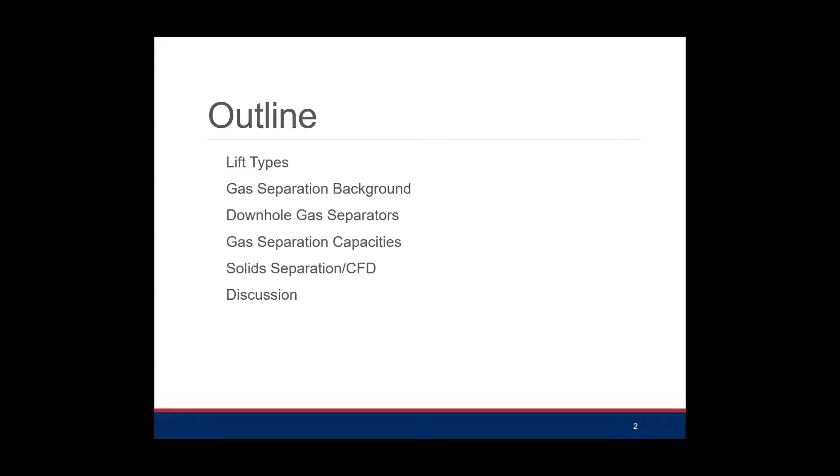The different types of downhole gas separators. We'll dip into the basic gas separators, talk about gas separation capacities, because that's something service companies always talk about - gas separation capacities. But where do those capacities come from? How do you calculate those? And then some research we did last year when work started to slow down during COVID, we started focusing on solid separation and combining that with CFD, computational fluid dynamics. And then just a general discussion.

So artificial lift methods in the US - there's a few more beyond this - but electronic submersible pumps, ESPs, rod pump, gas lift, plunger lift, and jet pump.

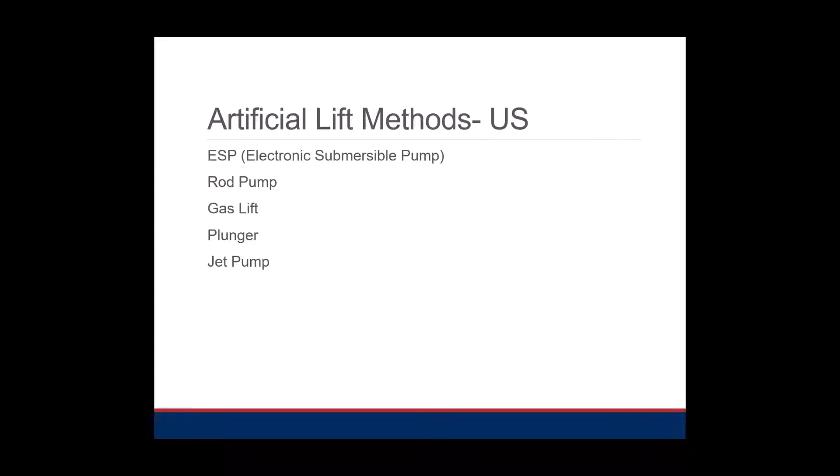So a rod pump is basically, we've seen it, a pumping unit. That pumping unit is tied to a rod string. That rod string runs downhole to a subsurface pump. It reciprocates up and down. The majority of US wells today eventually go to some type of rod pump well.

And each one of these rod pumped wells has a gas separator. So downhole pumps don't like gas. Gas is fairly compressible, whereas fluid is not compressible. So its efficiency - the whole system loses efficiency if gas is in that system.

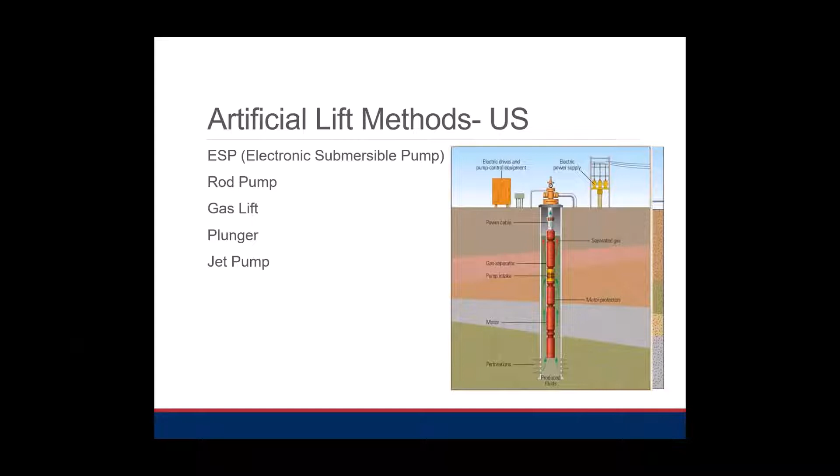Same thing with an ESP. So an ESP is an electronic submersible pump - it's a series of motors that spin a pump, and on those they have gas separators as well. So they're used in a higher volume type well.

A gas lifted well - you're essentially pumping gas down the annulus and injecting it into multiple gas lift valves, trying to reduce the hydrostatic column so the well will lift. Plunger lift can be combined with gas lift, where you have basically a tool that travels up and down in that tubing and helps lift some of that fluid so that gas can flow. And then jet pump is something that is still used today, but not quite as much.

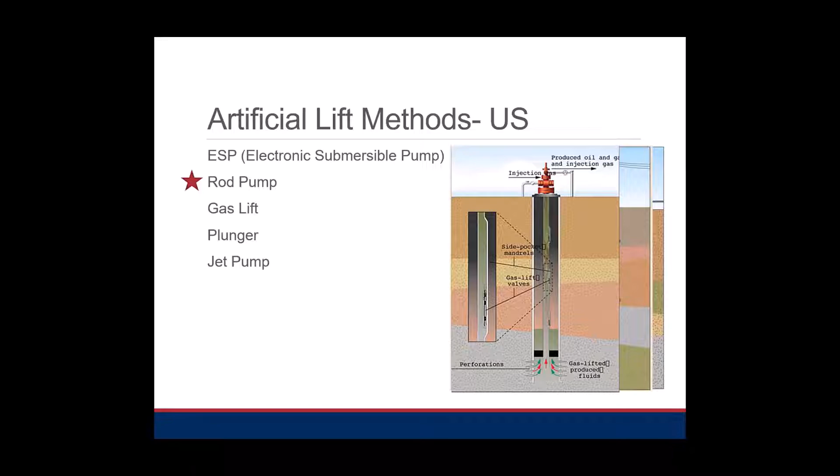So today, again, we're talking about rod pump, gas separation, solid separation, and a lot of these gas separators can be tied to ESPs as well.

So again, taking it back to basics - separator capacities, and looking at the rod pump system as a whole system. So what is it? What are its components? It's a motor, an electric motor - fairly efficient. It drives gears. The gears on the pumping unit are relatively efficient as well.

The rod string tied from the surface to downhole runs through tubing. That rod string rubs on tubing, so that's a little bit less efficient. The downhole pump is fairly efficient, so when it goes up and down, it pulls fluid with it, and that's efficient as well. And then we get to the downhole gas separator, and that was the thing that varied the most, from 0 to 99%.

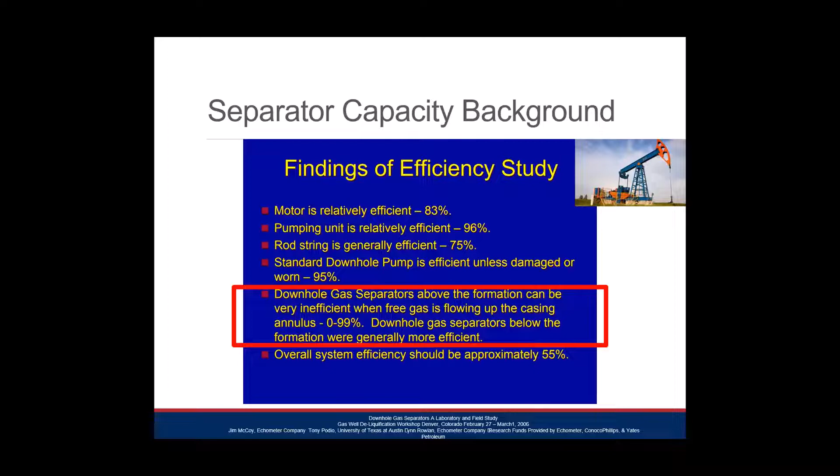So you can have a well that's gas locked, pulling in gas and essentially cannot pump, or you can have a very good gas separator that pulls in 100% fluid, and the whole system is more efficient. So overall, we wanted to look at the downhole gas separator and how it affects the whole system.

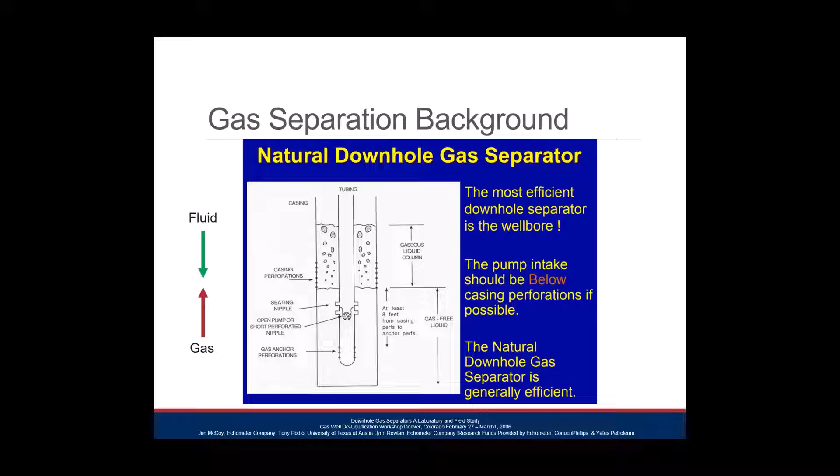So again, gas separators have been around for a long time, and the thing that's changed in the last few years is horizontal well bores. Historically, we've been able to sump a pump down below our perforations, and so gravity essentially does all the work. As fluid falls down, because gas is lighter than fluid, gas will go up. So slowly the liquid will come into the well bore and gas will rise, producing gas up the annulus and the fluid through the tubing.

Up until the early 2000s, we were able to drill a little extra rat hole, sump a pump down below the perforations on our target zone, and then put a pump below that target zone. Whereas today, drilling horizontal wells, we're either stuck leaving a pump at kickoff point or somewhere in the curve.

With these rod pumps and ESPs, they don't like to go through bends. They have moving components, and if we put them through a curve, they typically wear out, so we see more failures. Essentially today we see a lot of pumps stuck at kickoff point or sometimes pushed down through the curve. So we're now having to produce fluid and gas around that pump, and that's why a gas separator is a lot more necessary today than it may have been in the past.

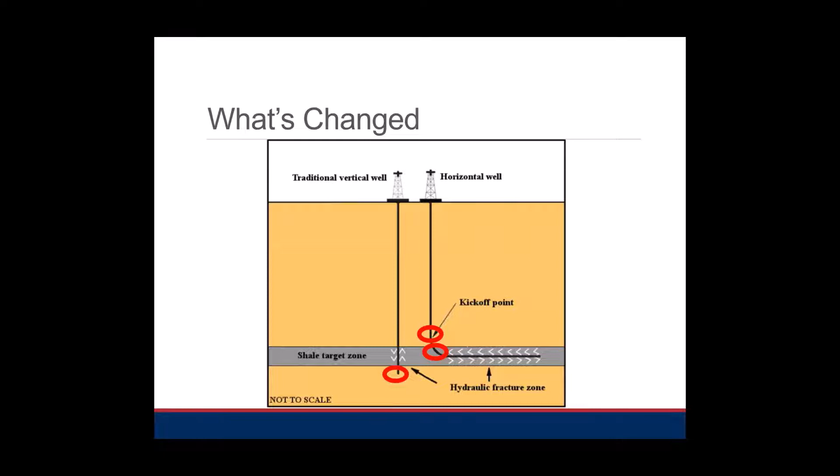But if we produce too much, we'll pull in some of that gas in with that fluid.

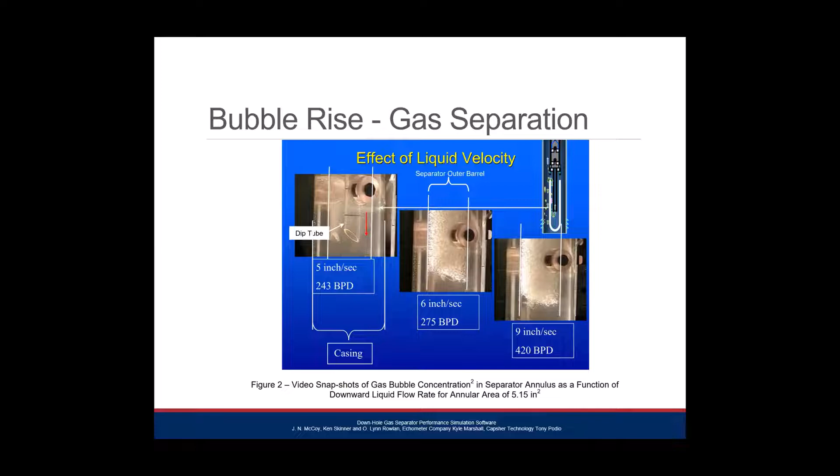At 9 inches per second, we're pulling down that fluid really fast. We're at 420 barrels a day, and we're pulling in a lot more gas, so the pump is much less efficient. This is the basics of bubble rise velocity, fluid production, and the gas separation area. All of those things are important to understand.

From that study, we're able to determine that gas is lighter than liquid, so gas will rise at a certain rate as fluid is being pulled down. We can do volumetrics and calculate the amount of fluid we can produce per square inch. In this case study with water and air, we're able to produce 50 barrels of fluid air-free per square inch.

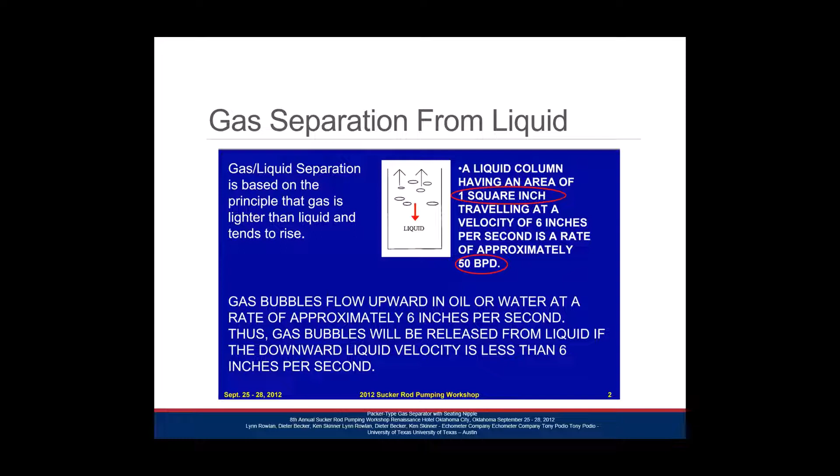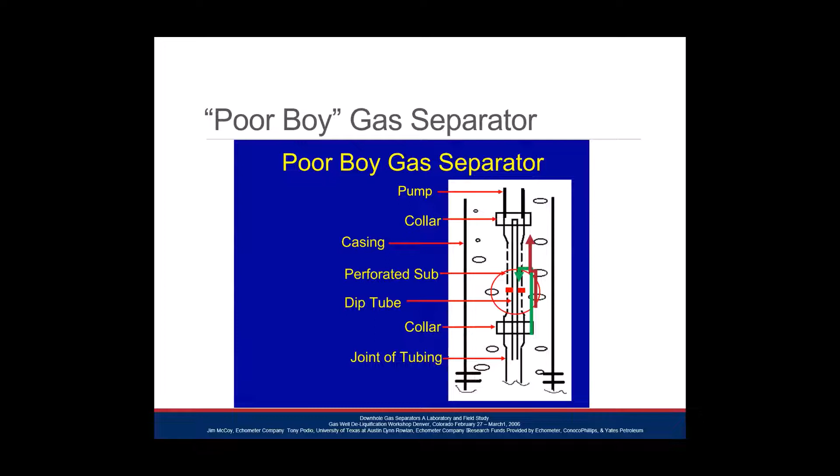Now we're looking at the surface area that these gas separators create. With the conventional separator and perforated sub, gas is produced, liquid is pulled in, gas escapes, and we're looking for the area between the perforated sub and the tubing and that dip tube, because that will give us a certain area, and we're concerned about how much area we're creating.

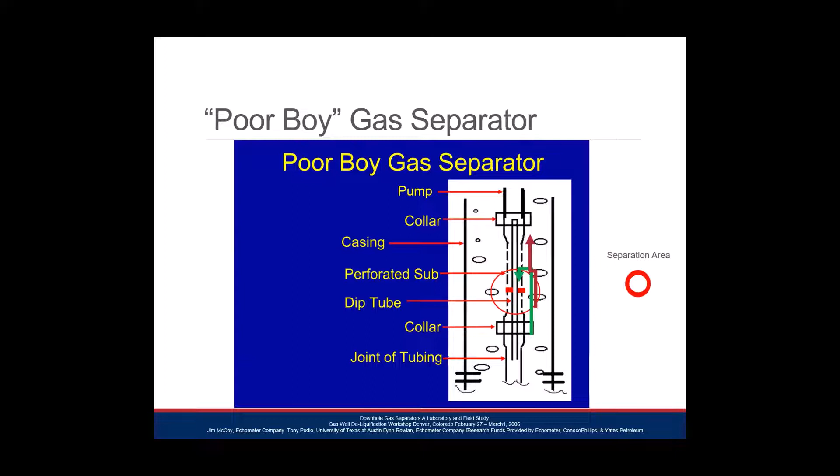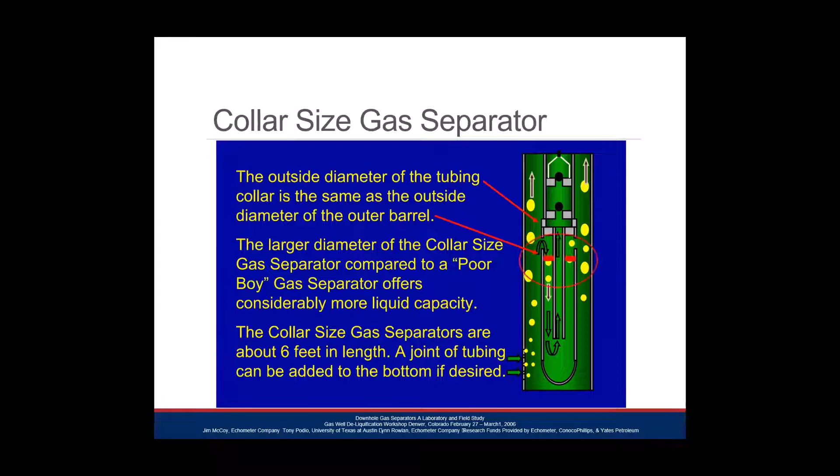I think of it like a donut. We're trying to calculate the donut area between the dip tube and the gas separator. With a poor boy, it was small. With a collar size, essentially it's a thinner piece of metal, the same OD as a collar, so essentially we have a little bit bigger donut area.

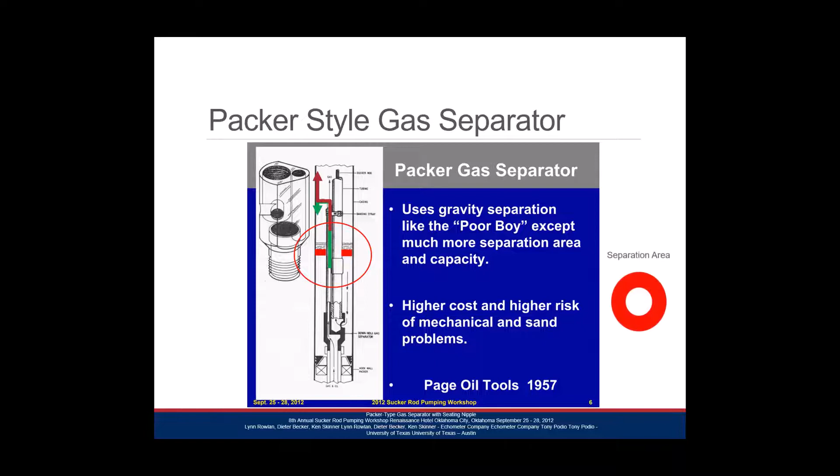Another type of gas separator is a packer style separator. It's been around for quite a while, since the 1950s, where we produce fluid. We set a packer and produce fluid through the tubing up an intake, and then the fluid will fall down, creating an artificial sump, just like the poor boy with gravity separation, and gas will go up the annulus. With this, we create a significantly larger donut area because we're no longer producing inside tubing with a dip tube, we're producing on the annulus of the tubing in a larger hole. So that separation area is significantly more.

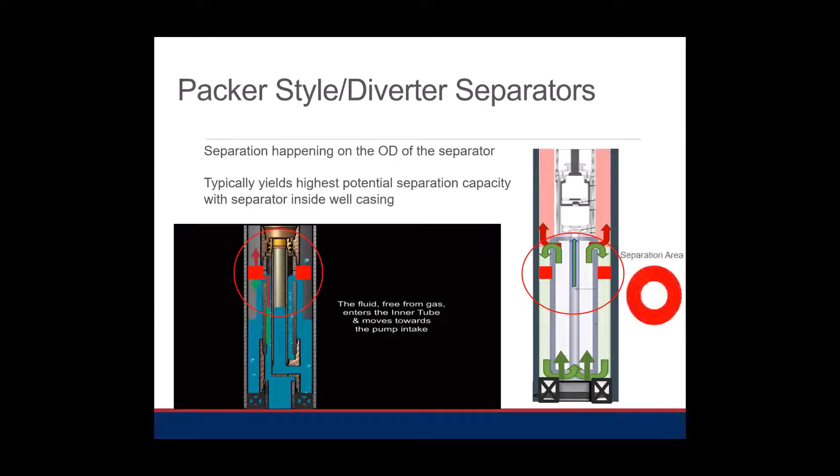Throughout the years, there's been different types of packer separators that have been created, all with similar designs. We're creating an artificial sump for gas to escape up the annulus and fluid to fall down.

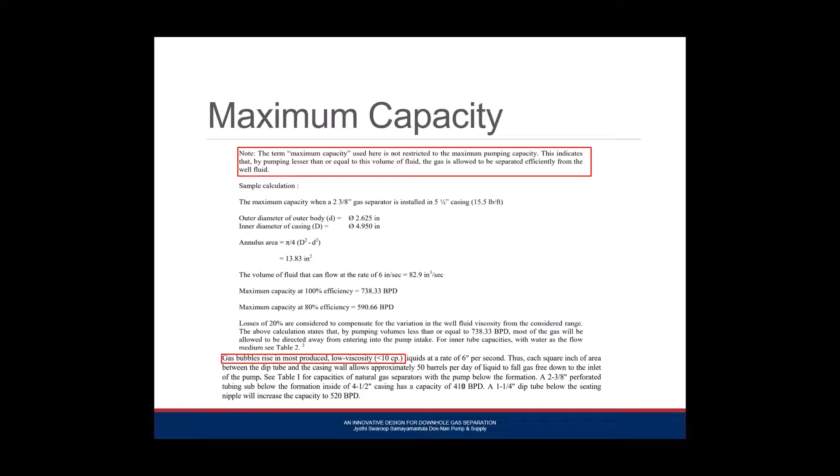When we talk about maximum capacity, we're looking for that volume, that donut area, times 50 barrels per day per square inch, which will give us a certain maximum capacity. So if we walk through those separators, these are very conventional separators.

A poor boy is the perforated sub. It's very economic to make. A 2 7/8 sub with a 2.4 ID, a 1.3 dip tube gives us an annular area of 3.3 square inches, times 50 barrels per day per square inch, gives us 166 barrels of fluid per day capacity, and that's maximum capacity, so that's air and water.

Collar size, we have a little bit larger ID, the same dip tube, giving a larger annular area, 229 barrels of fluid per day maximum capacity.

Packer style, where we're separating out fluid in the annulus, let's say we put it in a 5.5 inch wellbore with a 4.7 ID casing. The OD of the separator is 3 inches. Essentially we have more than double the collar size or poor boy at 10 square inches, giving us a maximum capacity of 543 barrels.

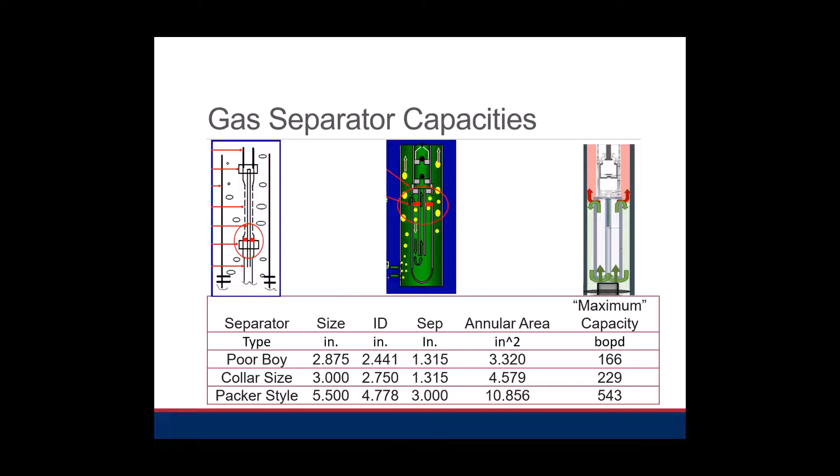Not saying one's better than another, they all have their place, but this is how we would calculate a capacity, or quote maximum capacity, which is something we see in industry today.

Those were all laboratory studies, and if we take it out to the field, what we're looking at is a pump card. So we look at the top left. Essentially what we want to see, simplifying it, is a square pump card. If it's not square, something's going on, maybe our rods are rubbing, maybe we're getting gas entrained.

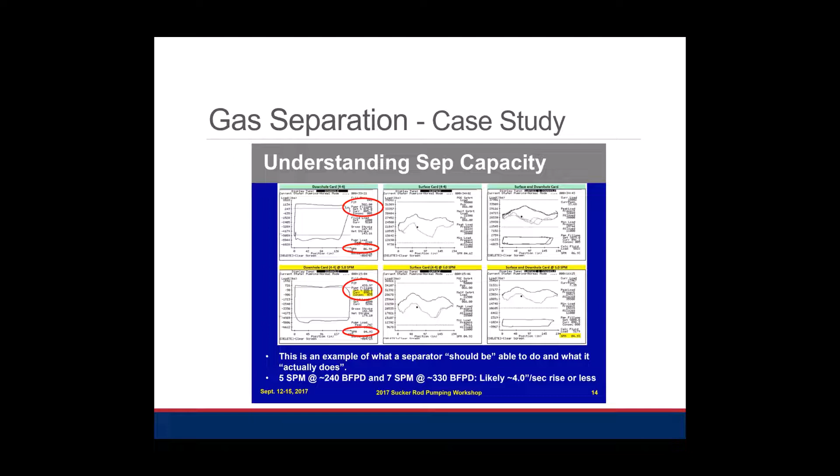So what we can do is a step rate test. If we're stroking this well at 5 strokes per minute or 7 strokes per minute and we get a non-square card, if we slow it down, the card should square out, and from that we can infer what a bubble rise velocity would be. If we've slowed our pump stroke down, we're pulling down fluid slower, so more gas should be able to escape. That's basically how we would look at bubble rise and maximum separation capacity out in the field.

The second half of what I want to talk about today was solid separation. Pumps don't like solids. Solids grind, solids wear things out, solids cause erosion. And if we stop pumps...

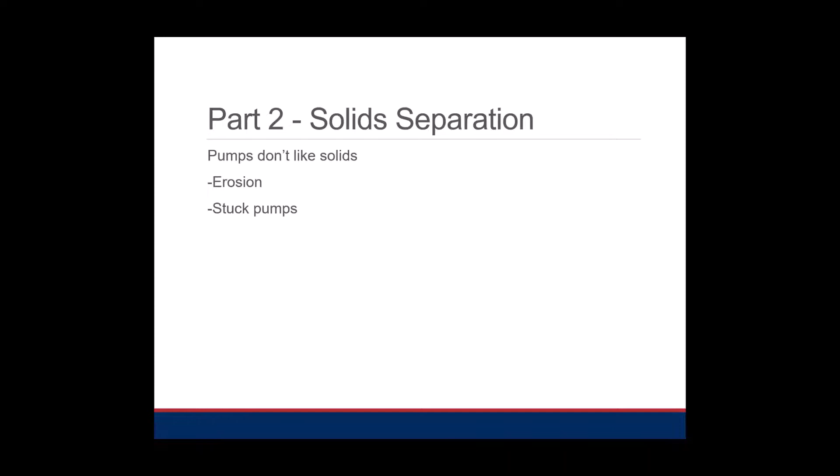Here in Oklahoma we had a really bad winter snowstorm this year, and our wells were shut off for like a week. So essentially all those solids, sand, formation fines that were being produced up the wellbore basically shut down and fell to the bottom. And if they're in the tubing, they fall on top of the pump. So if we have a stuck pump, we can have a rod part. It causes quite a bit of issue. So the second part combined in production is solids.

So what we see conventionally now is a hydrocyclonic separator. Hydrocyclonic separators have been around since the 30s and 40s, like Dyson vacuum cleaners and sawmills. Essentially it's an inlet that spins solids.

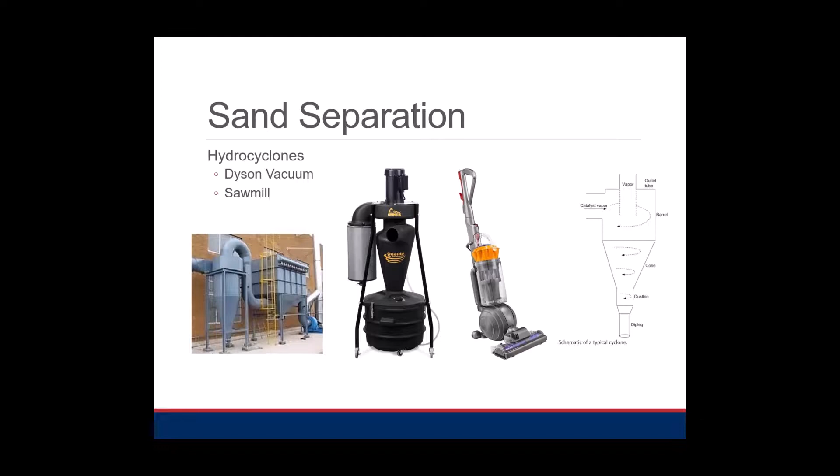And the heavier densities tend to go to the outside as they're spun. There's a cone that the solids hit and essentially fall out of the flow, and they fall downward, and the clean fluid goes up.

So as work was getting slower during COVID, we started modeling essentially everything that was out there to see what would affect it and what wouldn't, and started looking at this downhole hydrocyclonic sand separator.

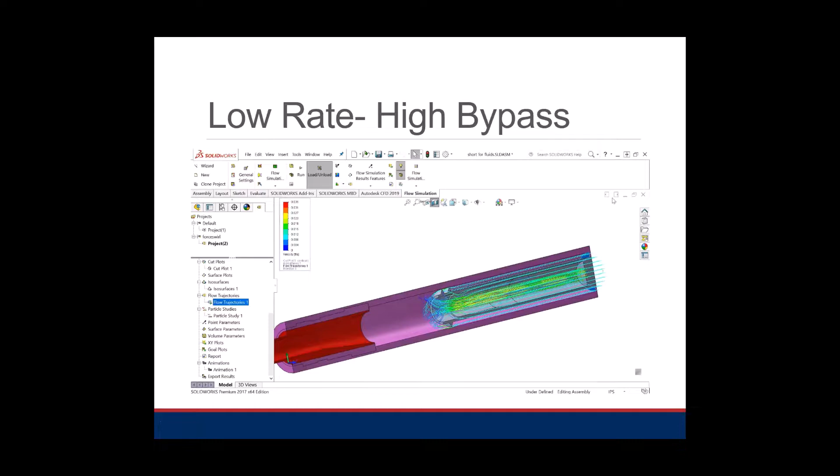What we see is that at a lower rate, with the tolerances machined in these parts, fluid can bypass it, and essentially the solids stay stuck in solution. That's something we want to avoid, since the cyclonic action needs to be enough to spin those solids to the outside. So if we size it right for the rates, we get enough velocity and are able to move that solid out of solution.

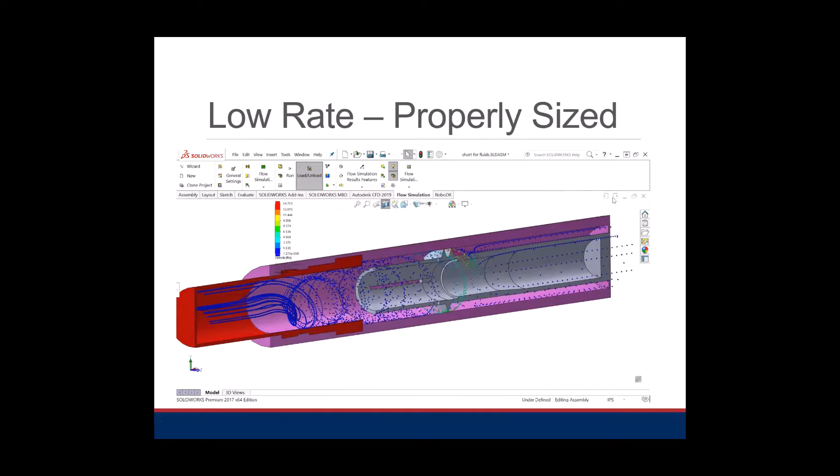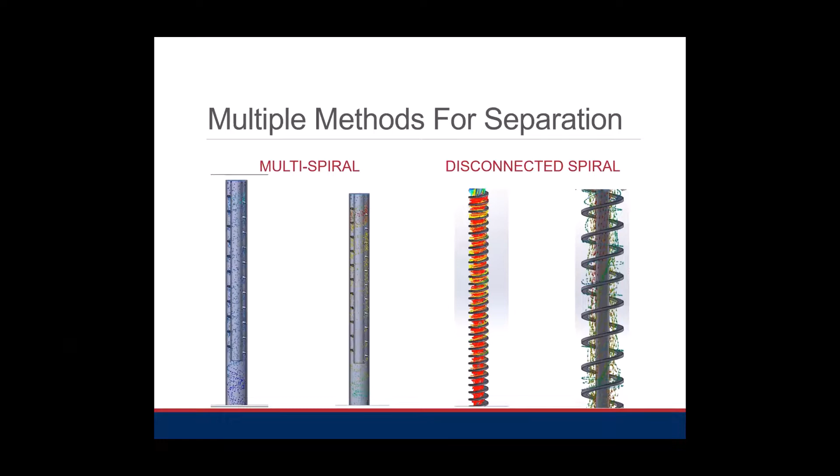I think that brings us to the conclusion that downhole gas and solid separation is an issue. We have gas and solid separators out there that work in various models, but it's important to know the differences between them and which method you'd employ in a certain type of well. They don't all work the same, and they don't all work in all applications.

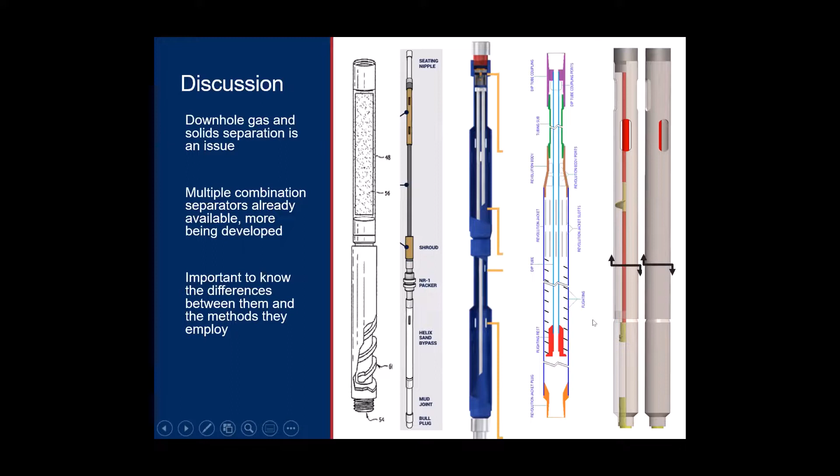And that's essentially all I had. Any questions?

Thanks, DJ, that was interesting. Any questions for DJ? None?

DJ, I have a question—this is Duncan Brown. When you're doing some of that modeling on the sand efficiency, getting spun out of those, how are you actually using the concentration of sand in that, and how is that affecting your results?

We haven't played too much with the concentrations. We've changed sizes, but essentially with the modeling software we just have to put in a constant stream and then determine the size. So it's all relative, essentially, is what we're looking for—does this change make it look better, or does it make it look worse?

What we've seen is in horizontal wells where they tend to slug, at certain points they'll bring up more solids than one of those separators is able to handle. We've talked about different designs, like a two-stage sand separator, but as far as being able to model something like that, we just haven't been able to.